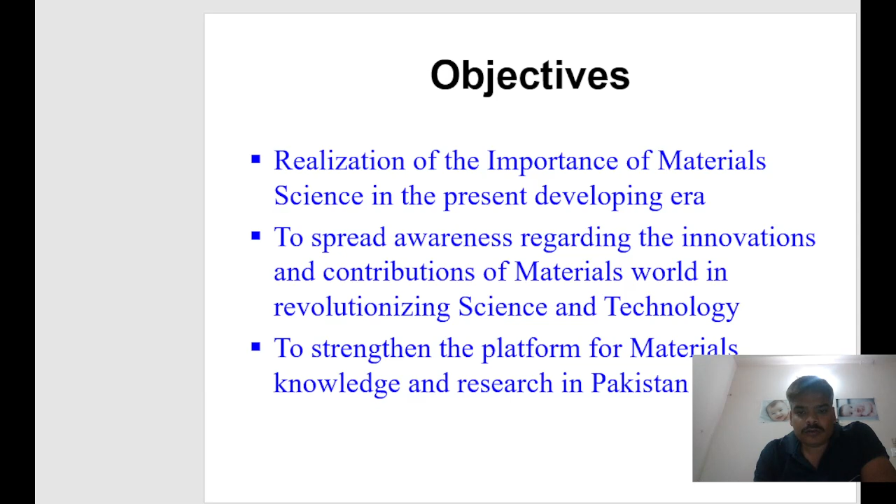And everywhere for particular purpose we need advanced materials for lightweight, for miniaturization in today's globalization, everywhere, energy sector, in communication sector, in service sector, everywhere we need good material having good property.

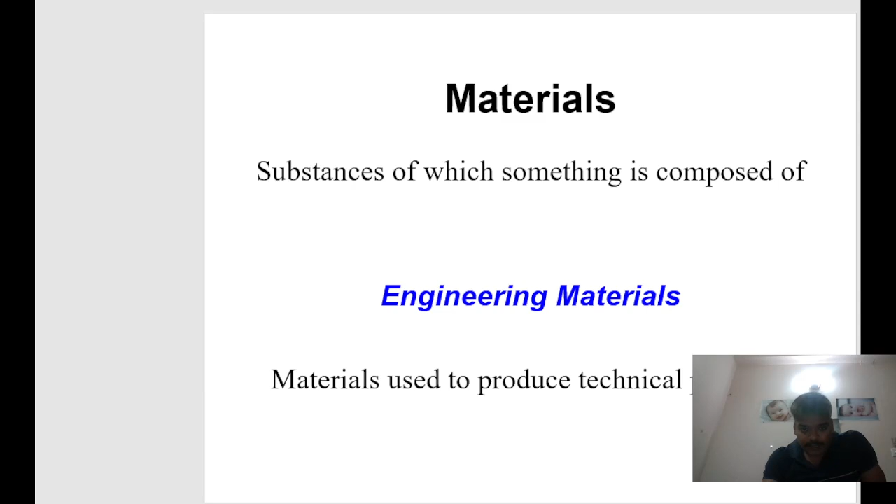So what is material? How do we define the material and what is engineering materials? Substance of which something is composed of. Engineering material used to produce technical product.

Material science is a scientific discipline which is primarily concerned with the search for basic knowledge about the internal structure, property, and processing of material. So material property is dependent on the microstructure and its constituent.

What are the elements present in the material composition and the morphology? How the composition, how the structure, microstructure of the substance - these things decide the mechanical material property for which particular application it is used.

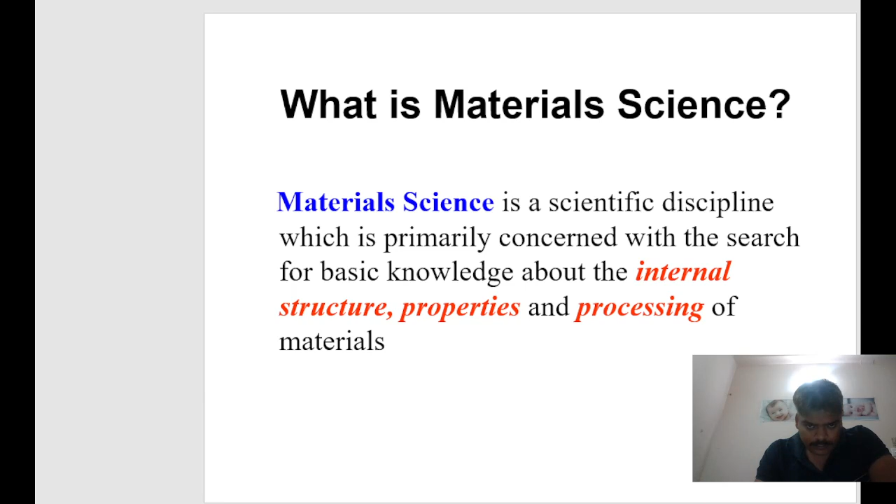So in history of material science, civilization is defined by the materials. In olden days, stone age comes into the picture. Then after stone, then bronze age, iron age, polymer age, concrete steel age, and then silicon age.

Now today is information age. So from BC to AD, these types of material came into the picture. From the material, civilization is defined. Material is very important. Everywhere we use the material.

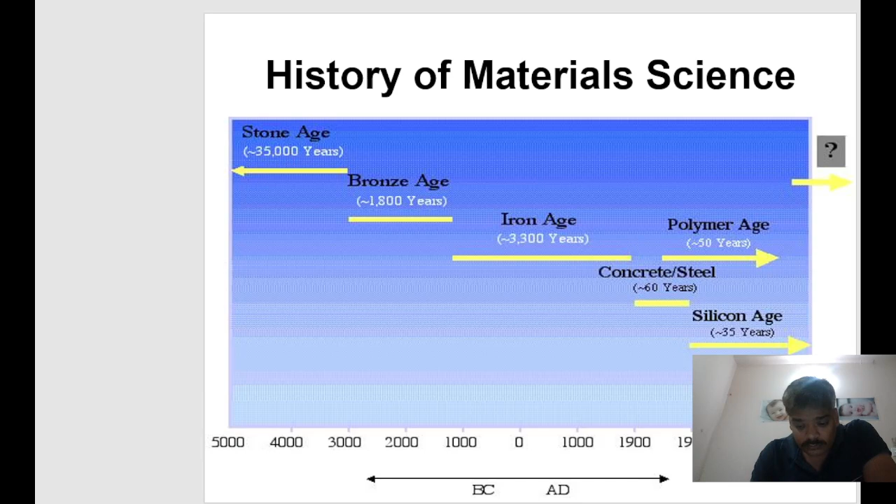Ferrous metal means iron is present. Non-ferrous means iron is not present. If we are going to classify ferrous, then ferrous is two types, steel and cast iron. And non-metal, if we are going to classify, then polymer and ceramics. These are the two. Each class has its own property and unlimited application.

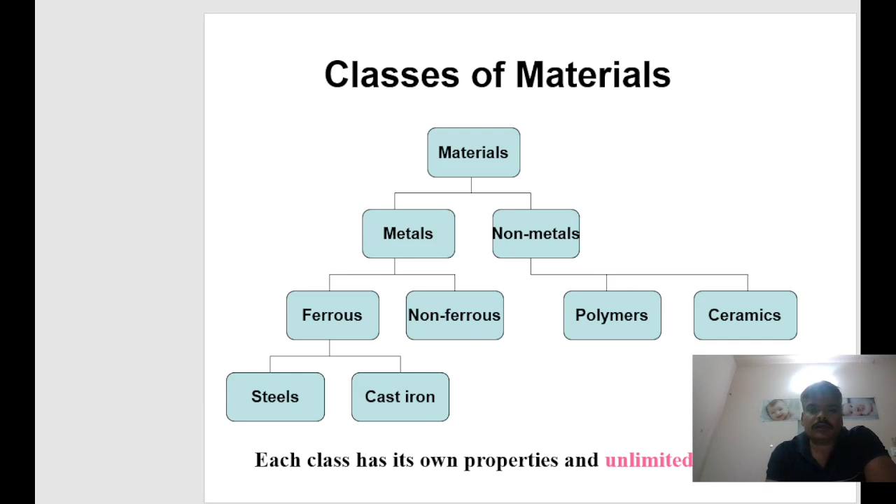Then next, we can design the material. Now this era is going on. We can design the material for which specific property we need. If we need high strength and high toughness for a particular application, if we need high wear resistance, if we need the material which is having high temperature stability, hardness, then we have to make the composite.

Composite means we can combine two materials for getting two properties. Suppose one is the metal and another one is the reinforcement. Metal is not that much hard, then we put the reinforcement of ceramic particle which is having high hardness. Then we get both the properties, ductility as well as strength, high strength as well as high ductility.

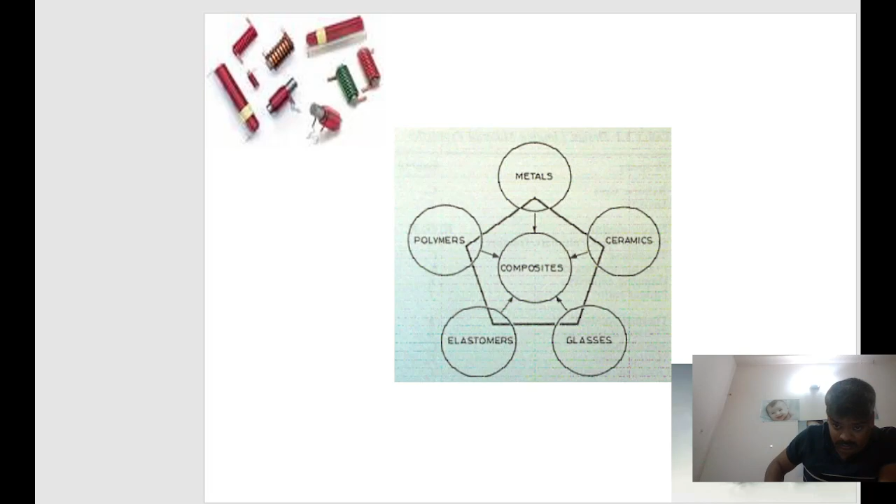So these types of material today are high in demand and lots of research is going on in research and laboratory. If we use metal for making the composite, then metal matrix composite comes into the picture. If we use ceramic, then ceramic matrix composite. If we use polymer, then polymer matrix composite. So today lots of research is going on in these types of materials: metal, ceramic, and composite.

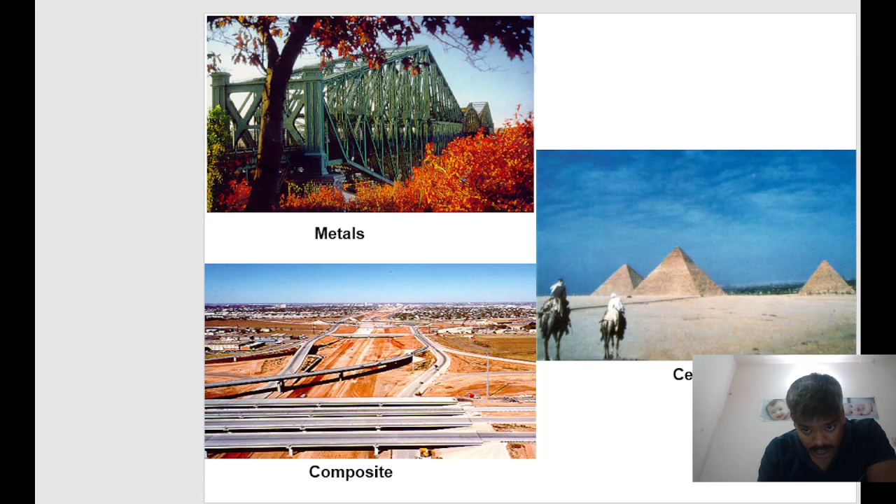These are the three pictures where material plays a very important role.

Next is the application of material science in aerospace, automotive, electronics, and medicine. In aerospace, if we want lightweight material having high strength, then aluminum. Aluminum has lightweight, but its strength is not enough for that application. So we use titanium and nickel based materials. Titanium has low weight and also high strength. These are the things going on in the material science field.

Automotive: in automobiles lots of material is required for pistons. Suppose you are making pistons, aluminum material, steel material, and lots of research is going on every time. The material should be lightweight so that engine efficiency will be high and have good properties, so that we can run at high speed and fuel consumption will be less. Components should have good efficiency and high quality. Lots of research is going on in this field.

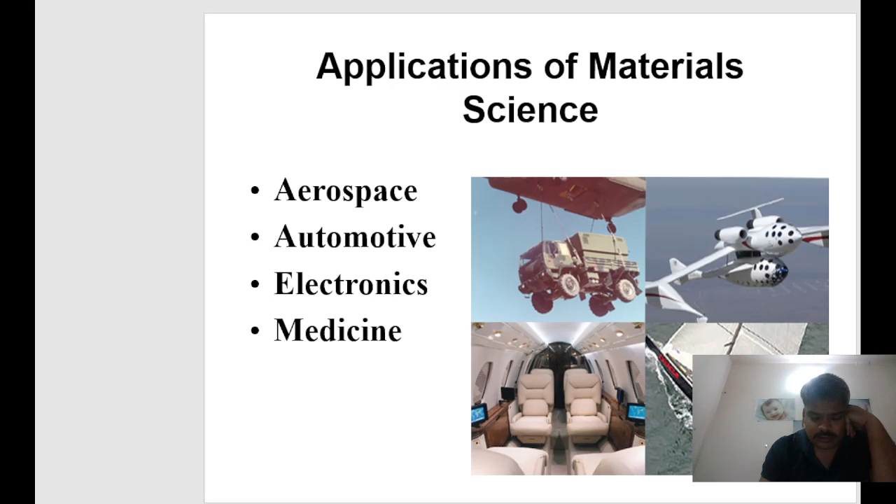Next one is the medicine field. In medicine, lots of research is going on for developing medicine which is used for removing disease. Lots of research is going on in biomedical engineering for creating human body parts, like bones, so that if a human's body part fails, we can provide that material. And in medicine too, lots of research is going on for which material, like nanoparticles, can be used for detecting cancers and destroying cancers.

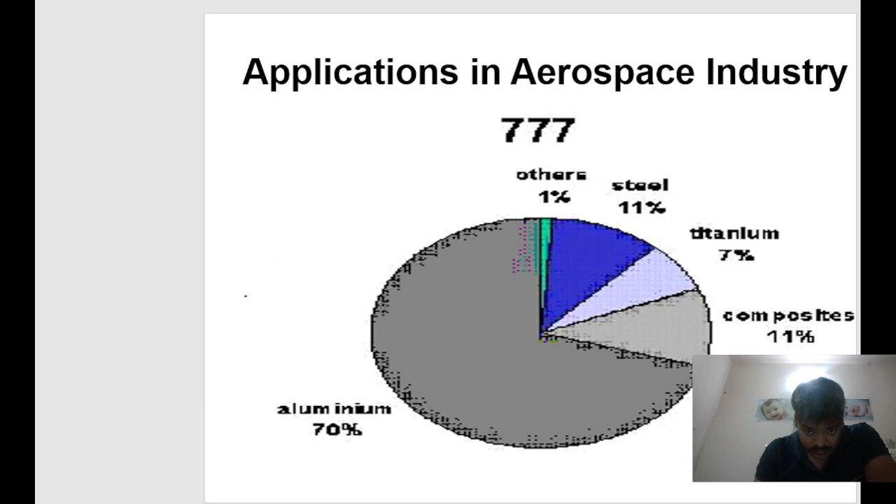Application in aerospace industry: if we are researching which material is used in aerospace industry, aluminum 70%, composite 11%, titanium 7%, steel 11%, other 1%. These are some research findings on the materials which we normally use in aerospace industry.

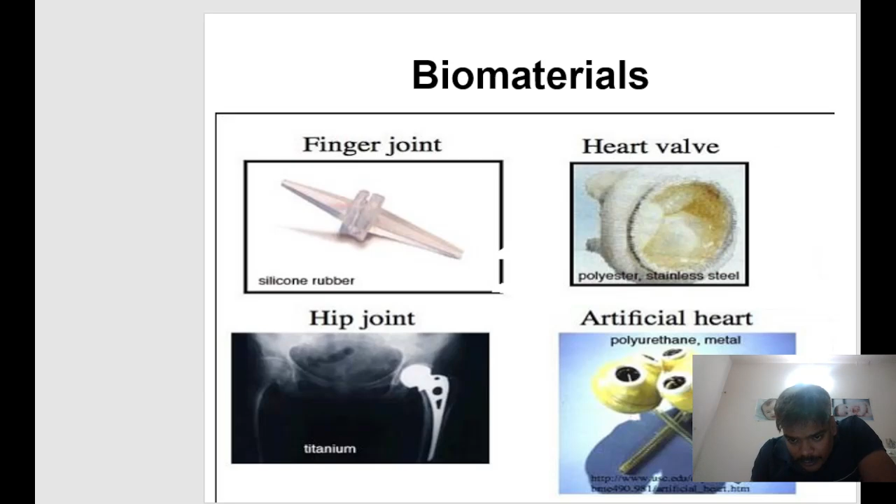Biomaterial, as I have already talked about: finger joint, heart valve. Finger joint is made of silicone rubber. Heart valve is normally made of polyester and stainless steel. Hip joint is made of titanium. Artificial heart is polyurethane and metals. So these are the biomaterials.

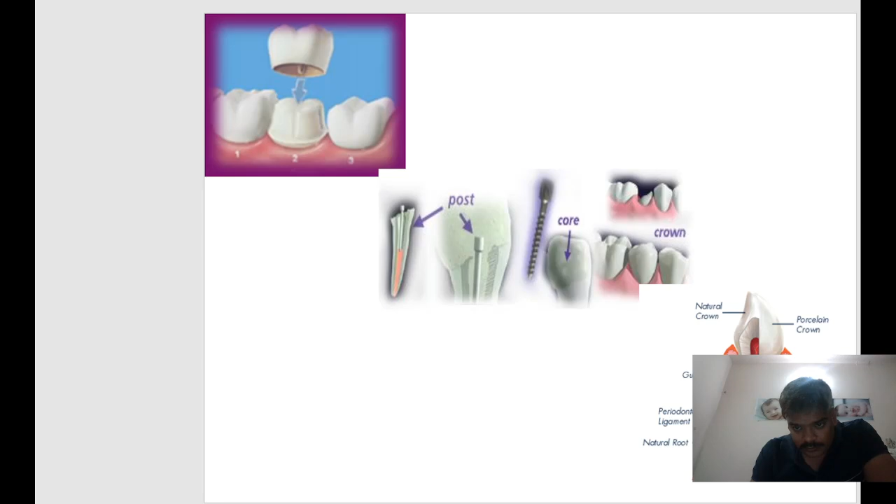Next, lots of teeth, and different types of material are used for making teeth.

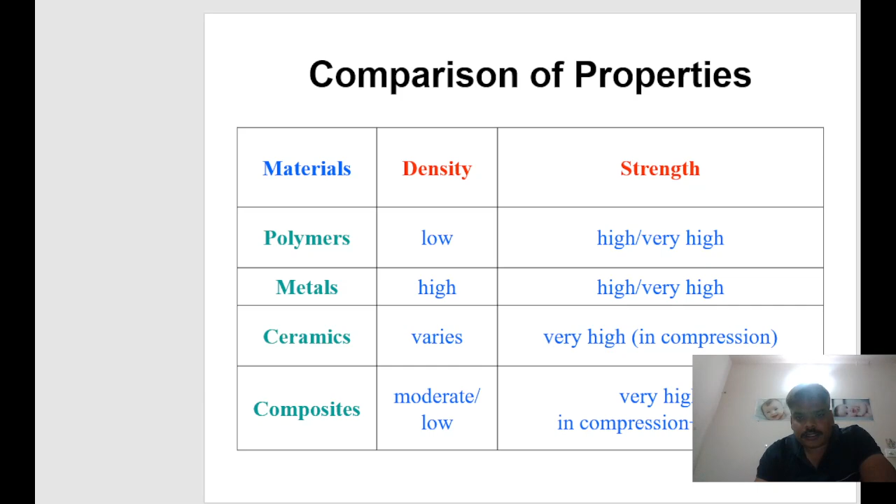So what are the properties of material which are required? If we are talking about material property, then we will discuss some properties which are very important. Main properties are elasticity, plasticity, ductility, brittleness, malleability, toughness, hardness, strength.

So what is strength? This property enables material to resist fracture under load. High strength is the requirement of every material, and material should be lightweight so that efficiency will be high.

Machinability is another aspect. For creating any product, we have to do operations by using a machine for getting the desired shape and size. If machinability is poor, then we have to face lots of problems during machining. So machinability should be very good so that for doing the machining operation, force requirement should be less, the machine tool does not wear out, and tool life will be more, among other things.

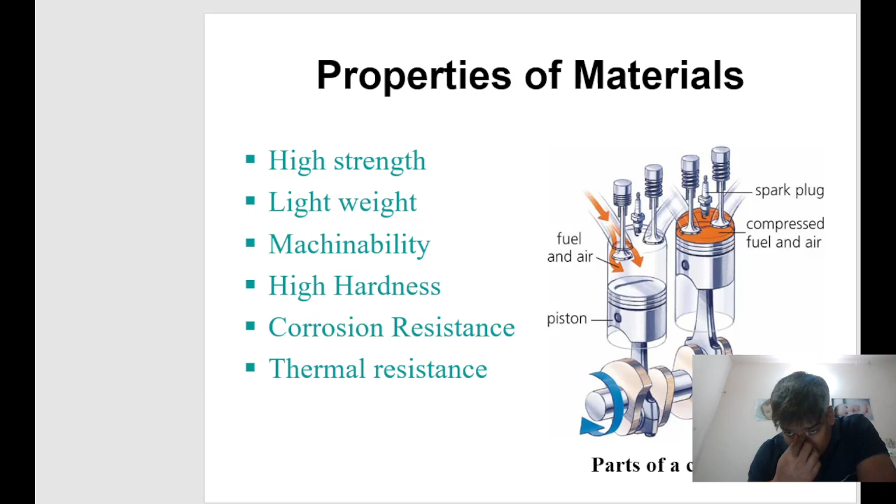Next is thermal resistance. If temperature is high, then material should not melt; it should sustain its structure. So melting point should be high. Next is the piston.

Piston is a very important part. It is used for generating power. We apply forces on the piston, and this energy gets converted into mechanical energy. We use fuel like petrol or diesel, and this fuel produces energy that puts force on the piston, then the piston gives mechanical energy. This happens in all engines.

If we talk about the engine, what happens is we produce mechanical energy from the chemical energy of the fuel. We use fuel, it burns, and combustion takes place. After combustion we get energy, and this energy is used for running the piston. The piston is very important.

How do we make the piston? Piston is made of aluminum, cast iron, and steel. Aluminum and cast iron are preferred mainly because they are lightweight, corrosion resistant, easily machinable, and cheap. This is the figure of the piston and connecting rod. In the engine, the piston is everywhere.

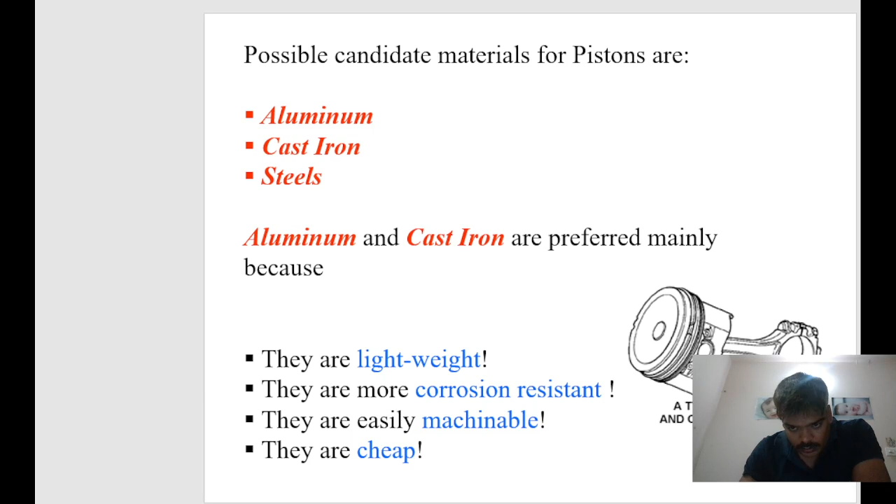Processing of the material: we get raw material from the earth, lots of mines are there. Aluminum comes from the earth in the form of bauxite. Steel comes in the form of raw material we get from the mines.

Then by using different processing, first extraction, then processing it using cupola furnace, muffle furnace, and other furnaces, we get pig iron, different types of pig iron, from the material we get from the earth. The steps are extraction, shaping, machining, heat treatment, and surface treatment.

After getting the material, we have to shape it into the proper shape. Suppose we want to make a crane hook, sharpen a cutting tool, flywheel, gear, or pulley, then we have to do shaping, lots of operations, manufacturing - casting process, machining process, bending process, forming process. After this we get the desired shape and size.

Next one is heat treatment. What is heat treatment? Heat treatment is done on the material for getting the property which we require. Suppose we want ductility - material during machining gets over hardened, then we perform the annealing process. And suppose we want the surface to be very hard, then we use the quenching operation. So these types of things happen.

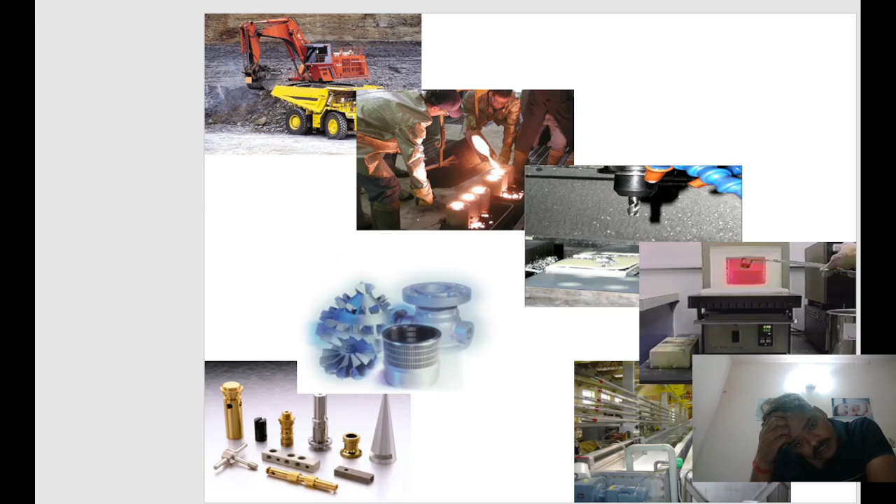There are lots of processes: coating, cladding. By doing these operations, we treat the surface to have different properties. These are the things which happen in coal mines. We use coal for getting energy in power plants.

The next figure shows the casting process, and after that the drilling tool is used for the machining process. Here lots of tools are used for creating different shapes. Here we use the forging operation, and here we do the heat treatment process. So these are the things which happen in the study of materials.

What are the subfields of material science? Nanotechnology, crystallography, material characterization, metallurgy, electronic and magnetic materials, surface science, tribology, ceramics and refractories. Material science is a very wide subject, lots of things are there.

For studying material structure, we use crystallography, material characterization, metallurgy - how we can create the materials, surface science, ceramics, and refractories.

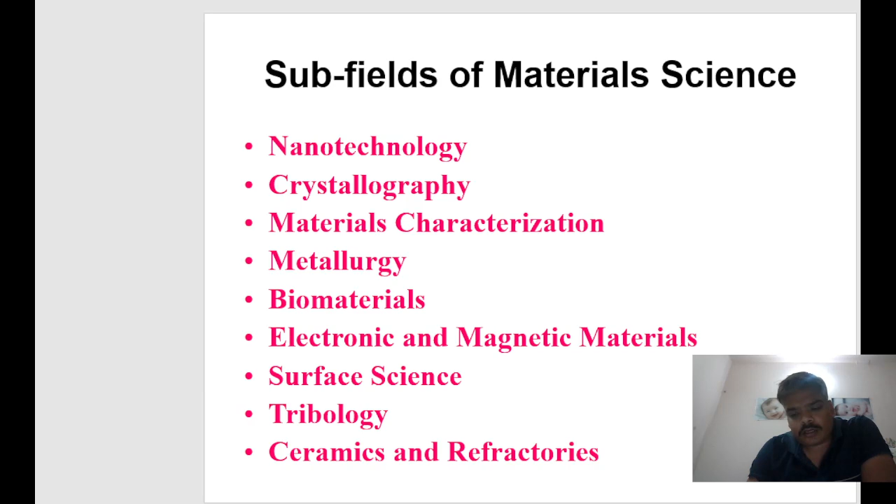Nanotechnology is the control of matter at the nanoscale. A structure having at least one dimension between 1 and 100 nanometers is known as a nanostructure. Interesting features of nanotechnology include increased miniaturization with enhanced performance, enhanced electrical and optical properties, and material with greater strength. A small thing can make a big difference.

Feynman is the scientist who developed this idea - there is sufficient scope at the bottom. So if we create the structure of material at the nano level, then different properties come into the picture.

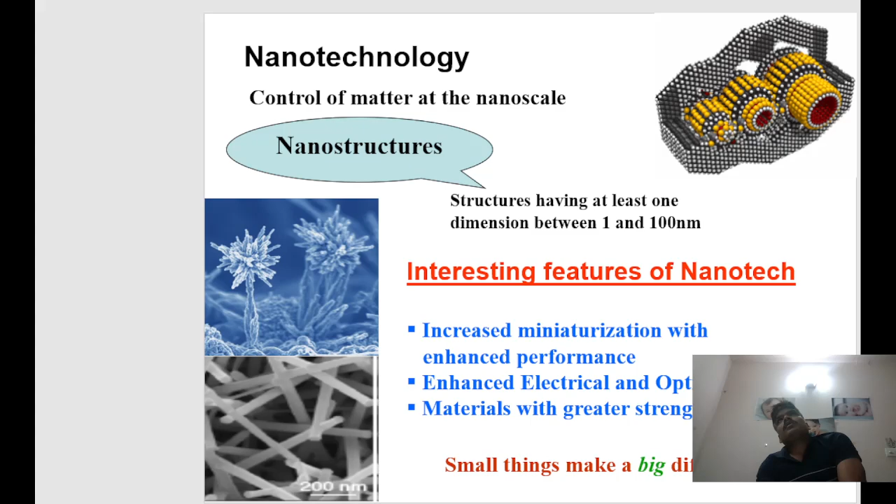Crystallography, atomic structure, crystalline, non-crystalline. Then I am going to talk about what is the crystalline material and what is the non-crystalline material.

Crystalline solid has a regular arrangement of crystal, and in amorphous solid an irregular arrangement of crystal happens.

Crystal lattice is a regular 3D arrangement of constituent particles in space. Each point in a lattice is called a lattice point.

Then, what is the unit cell? Unit cell is the smallest 3D portion of a complete space lattice which, when repeated over and again in different directions, produces the complete space lattice. The dimensions along the three edges A, B, C, which may or may not be mutually perpendicular to each other. So these are the things about the unit cell.

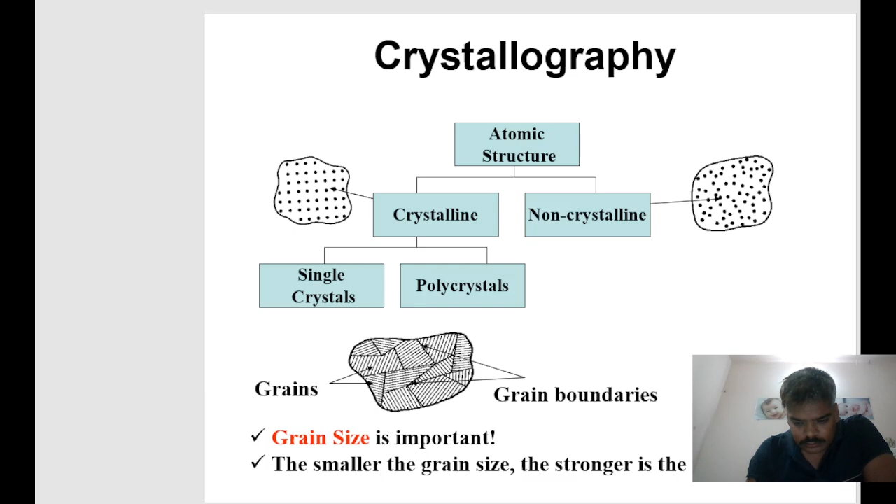Grain size is very important. Grains and grain boundary, as you see in the figure. The smaller the grain, the stronger is the material. The grain should be smaller.

This is the microstructure: ferrite crystal structure, pearlite microstructure, and austenite crystal structure.

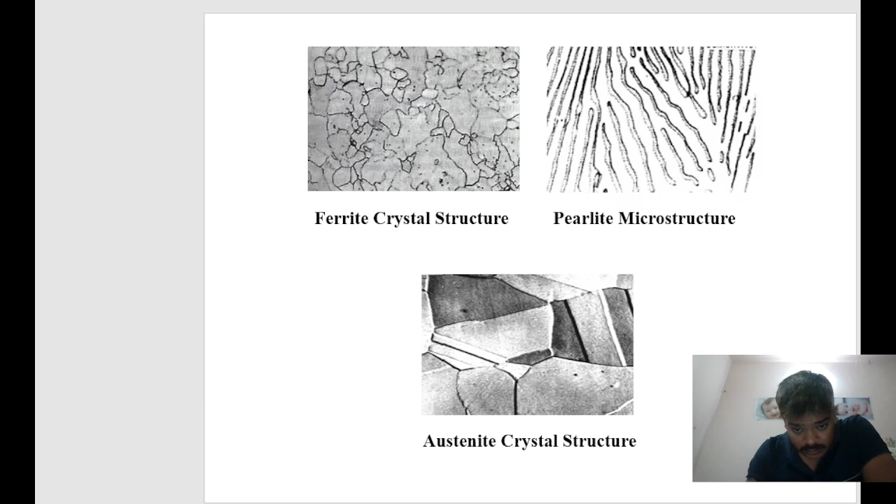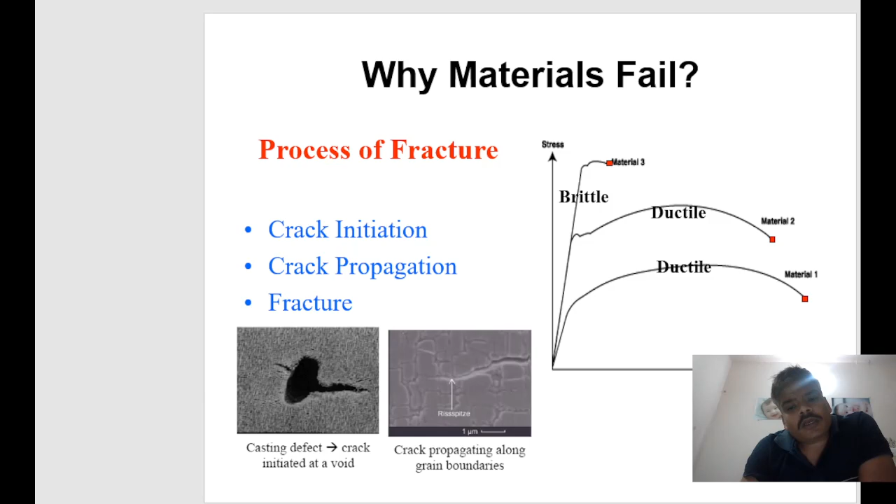Why does material fail? There are lots of defects in the material. Upon applying forces, crack initiation starts. After crack initiation, the crack propagates and fracture takes place. In a casting defect, crack is initiated at voids, crack propagates along the grain boundary, and then fracture takes place.

Next is material characterization. Microscopy is used for seeing the grain growth pattern.

Next thing is the tensile test on the universal testing machine, for getting the tensile strength, compressive strength, and shear strength.

Next is hardness testing, resistance to abrasion, which is done on the Rockwell hardness test, Vickers hardness test, Brinell hardness test. X-ray analysis is used for studying the crystal structure.

Bragg's law is there: 2d sin theta is equal to n lambda.

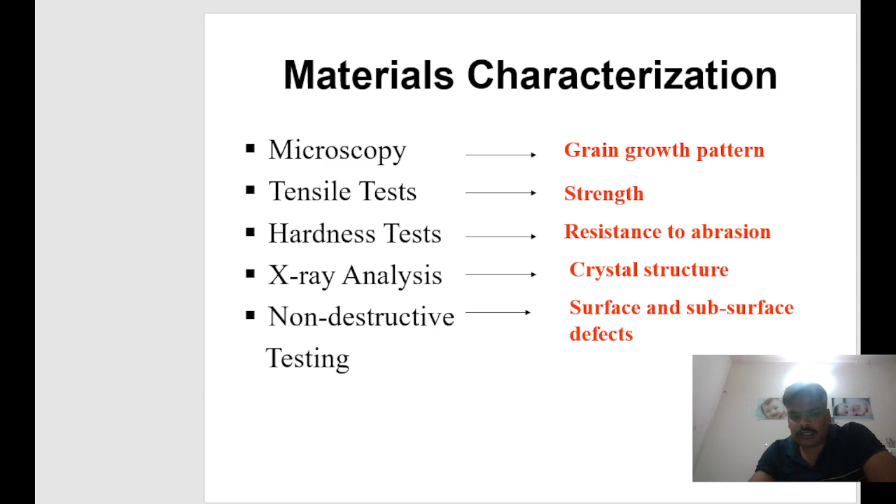Non-destructive testing covers surface and subsurface defects, white layer formation, work hardening. These are the things which we study in non-destructive testing.

Compression test. Bending test and shear test can also be performed. That's all about the materials.

I'm going to talk about some more things: what are pure materials, what are alloys, super alloys, composites, and what is the difference between alloy and composite?

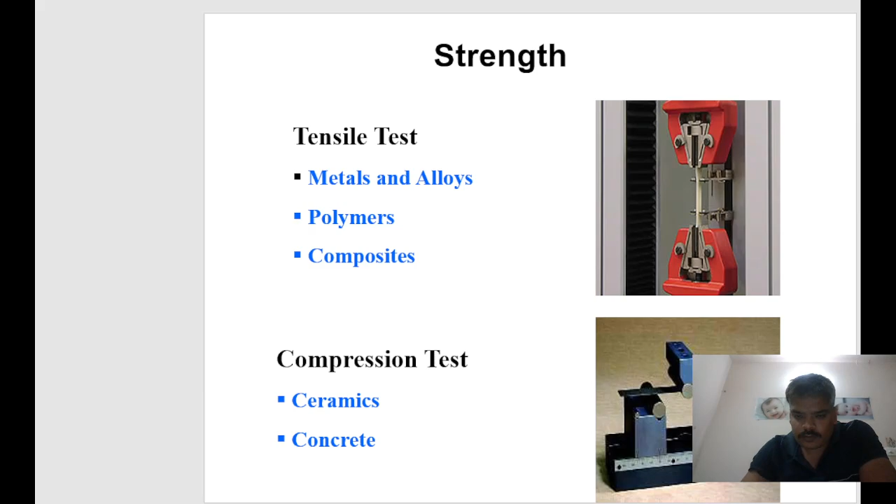First, I am going to tell what are the alloying elements in steel. If we put carbon in the steel and the carbon percentage is more, tensile strength improves, hardness improves, resistance to abrasion improves, but it reduces ductility, toughness and machinability.

If chromium percentage is more in the steel, it improves tensile strength, hardness, hardenability, toughness, resistance to corrosion and scaling at high temperature. So these are the different elements which produce different effects.

Cobalt, if we use cobalt, increases strength and hardness, red hardness of high speed steel. Columbium stabilizes stainless steel. Copper improves corrosion resistance.

Manganese reacts with sulfur to improve forgeability and reduce sulfur embrittlement. It also improves strength, hardness, hardenability, scaling and distortion effect.

Molybdenum increases strength, hardness, hardenability, toughness, as well as creep resistance. It also improves machinability, resistance to corrosion, and red hardness.

Nickel increases strength and hardness without sacrificing ductility and toughness. Nickel is used for increasing strength and hardness.